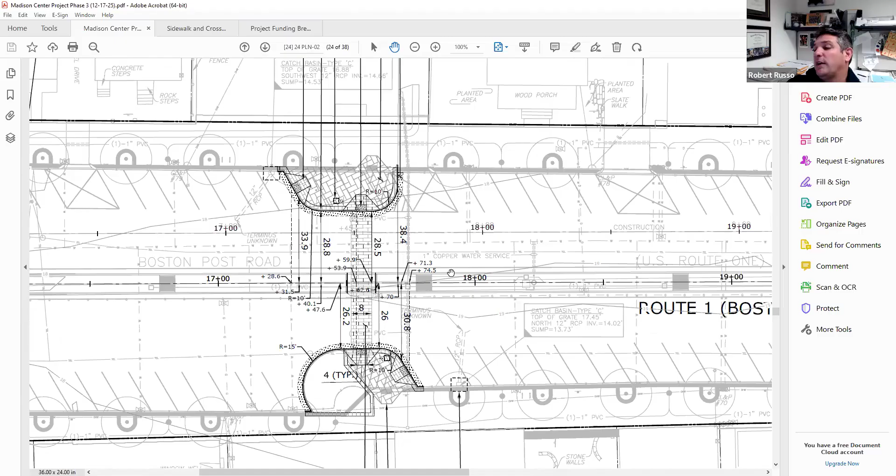I think that was certainly something very desirable. Historically the state was always resistant to mid-block crossings, not at a stoplight or anything, but they've really changed their whole view of these things in terms of trying to make things more pedestrian friendly.

We really wanted this as part of the project because everyone agrees it's a little chaotic with people crossing wherever. So we're going to try to get rid of those little tiny sections of the median that people try to walk on, and get them to use the crosswalk instead, which will be safer.

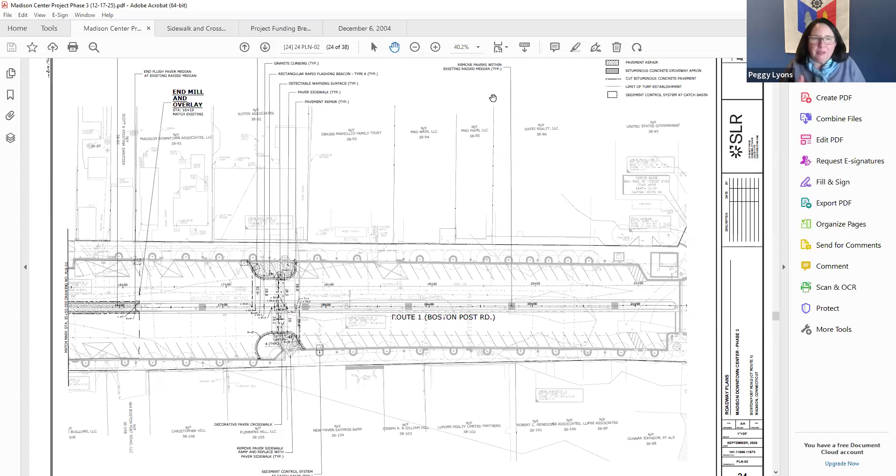It'll be ADA accessible with ramps and things like that. We have a note here to remove pavers within the existing median. You can see here, 1, 2, 3, 4, 5 - there are 5 of these brick paver areas.

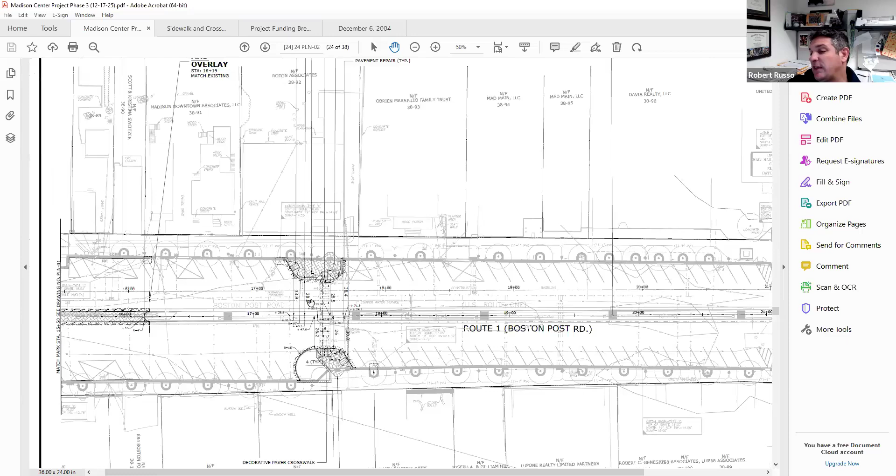We'll be removing those and adding landscaping, so you'll have a safe means to cross the street with this mid-block crossing. Outside of that, we'll extend a flush median here in front of the firehouse, since for safety reasons they need to access both westbound and eastbound.

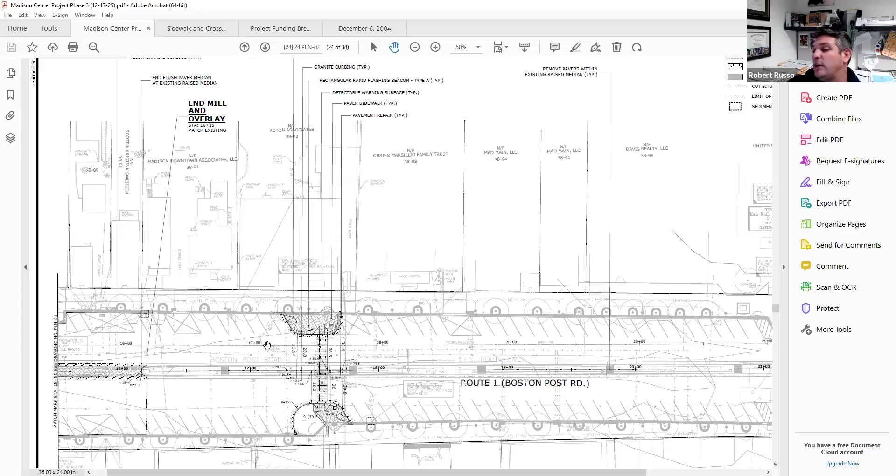Going back to that prior sheet - from where our existing island ends now, there'll be a flush paver median to about where it lines up past the firehouse, past their driveway. We'll start the other median lined up with the Tuxis Pond walkway, so fire apparatus and trucks can come out and go westbound or eastbound.

There were a number of DOT comments, and we also provided some input. If you're available January 12th, feel free to chime in and take a listen. If not, I could send you our latest and greatest plans in early January.

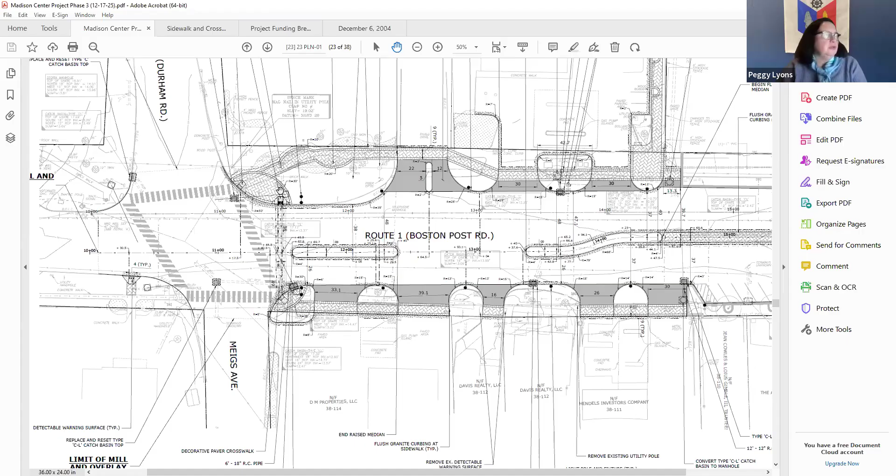I also want to mention that the state is redoing the crosswalks and the lights at that intersection, and that impacted the design a bit.

We've asked about returning that secondary back exit onto Route 79 that they did temporarily. They're pretty much a brick wall on that - that area is designated as their right of way line, and it's considered a non-access line.

You can't necessarily break it - they heavily advise against it and generally don't break these non-access lines. Not that you couldn't, but from my understanding speaking with the state, it's a significant process, and they're not particularly keen on breaking this line.

For the improvements done here to this property recently, that was permitted only as temporary - it was more of a hardship suggestion due to closing down these businesses here. So they allowed this temporary break, but from my understanding, they're not open to breaking this for permanent access on Durham Road.

The feedback was unbelievably positive when it was open. Unbelievably positive, I know. I intend to keep pushing this a little bit with them.

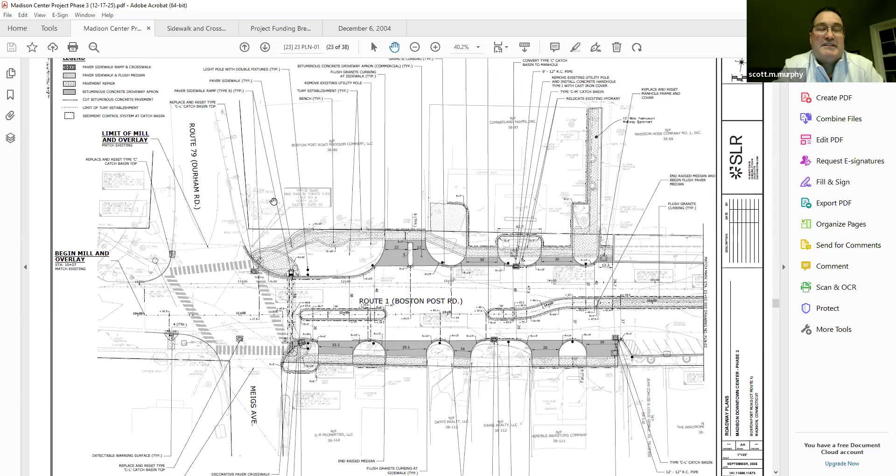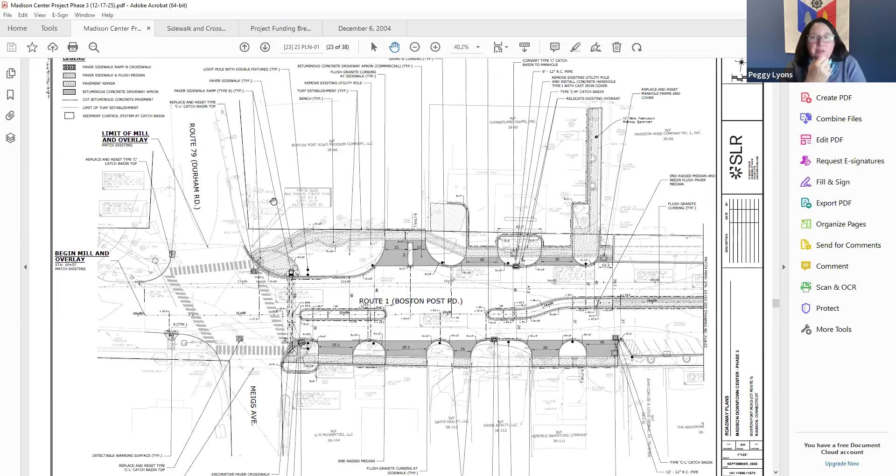One thing I'd like to note is that the town pursuing that alternative is not part of the downtown center project. We're currently on a ticking clock and we don't want to blur the lines or upset the state. I get it. So that's going to be a separate conversation once we get our plan approved for this, because it's not really related, it's private property. But it is something we all recognize could be a big benefit to the traffic down there.

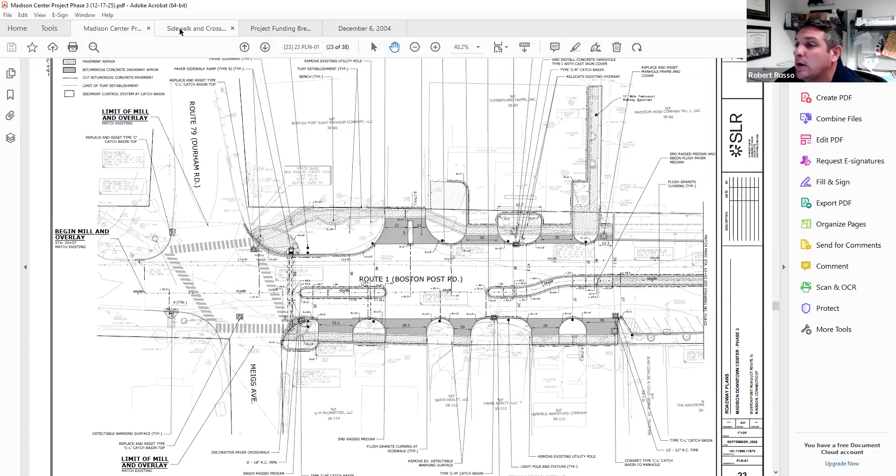So that's basically it, we'll have clearer plans again. These are probably around 50% now, we'll have like 75% with DOT incorporated comments come January 12th. And with that, I'll segue over to the sidewalk crosswalk project.

Again, this is multiple sheets, so I'll resend the link that I sent with West. Essentially this is Surf Club Road and West Wharf, so we're proposing the sidewalk along West Wharf here.

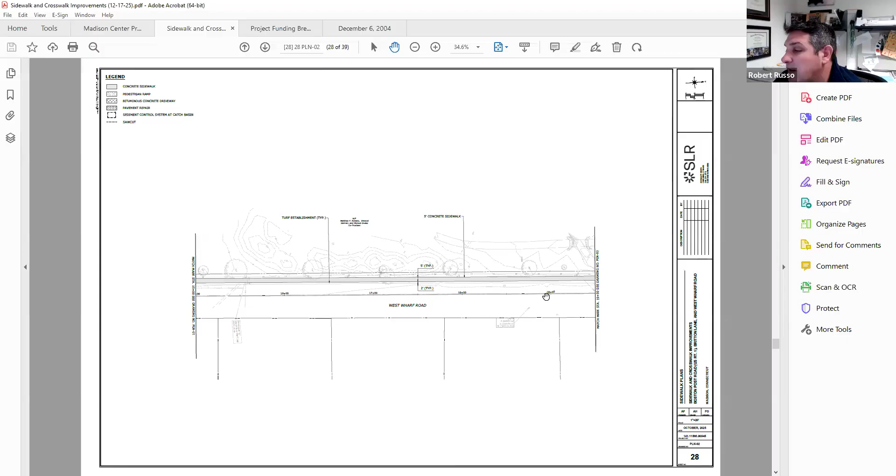This is the golf course on this side here, the westerly side of the sheet. We continue going along up West Wharf, accessing the club parking lot here, and then ultimately we get to the intersection of West Wharf and Boston Post Road.

As the DOT had recommended as part of our LOTCIP application, we have the crosswalks here and the rapid rectangular flashing beacons, but we also have a bus stop location right here, and on this side, another bus stop location as well. Again, that came at the suggestion of the DOT.

So that stop location is right by that house on the corner, Rob? Well, on the north side or the south side? Where you were just pointing. Right here. There's actually a bus stop over here, the westbound bus stop. Is there one on the north, up top of the road too? Yeah, it's over here. Isn't that right by the house? Isn't there a house right there on the corner? No, this is the parking lot for the country club. Okay, I'm not oriented right. Okay, yeah, the clubhouse for the country club is right here, with all their parking.

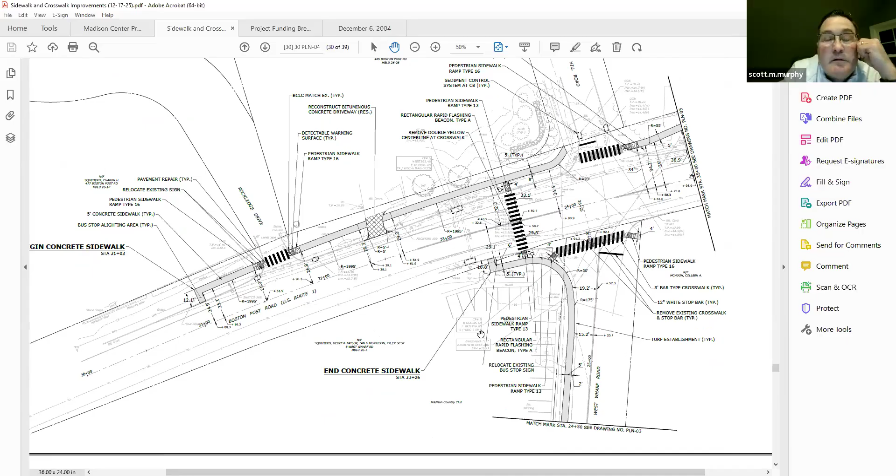So that's this sheet, and then just moving along here we'll continue. Basically you have the ability to cross over Lantern Hill, and then going eastbound on the north side of Boston Post Road, you'll be able to follow the sidewalk along here. We tried to keep it away from the road for a portion of it, but because of some rock outcroppings, we had to keep it abutting the roadway. The good thing is there's an 8-foot roadway shoulder there, so it's not exactly right next to the vehicular travel, there's still an 8-foot zone.

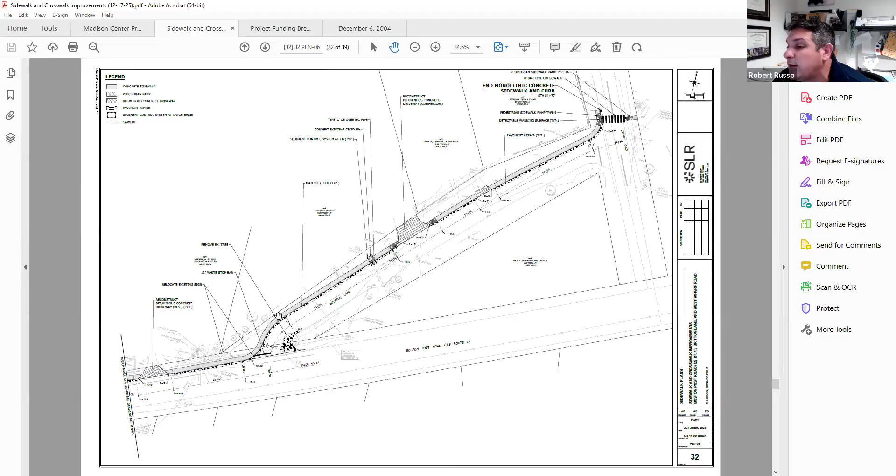So we'll follow along the north side here until we get to Britton Lane. Again, pardon me, this is a preliminary design, this curve in Britton Lane is going to be altered a bit, it's not going to be as sharp, we're going to tweak this. But essentially the sidewalk will follow along the north side of Boston Post Road and then enter Britton Lane on the north side, ultimately making its way up to Copse Road, where we'll have a crosswalk to access.

This right here is the town green. So you'll be able to go from downtown center to the town green, or if you're at the farmers market, you want to walk down to the beach. This is a highly frequently pedestrian traveled corridor, especially in the summertime. So if you're at the concert and want to go to the beach, or vice versa, you have the ability to walk in between the town green, ultimately connecting to the downtown center as well, to the Madison, to the surf club.

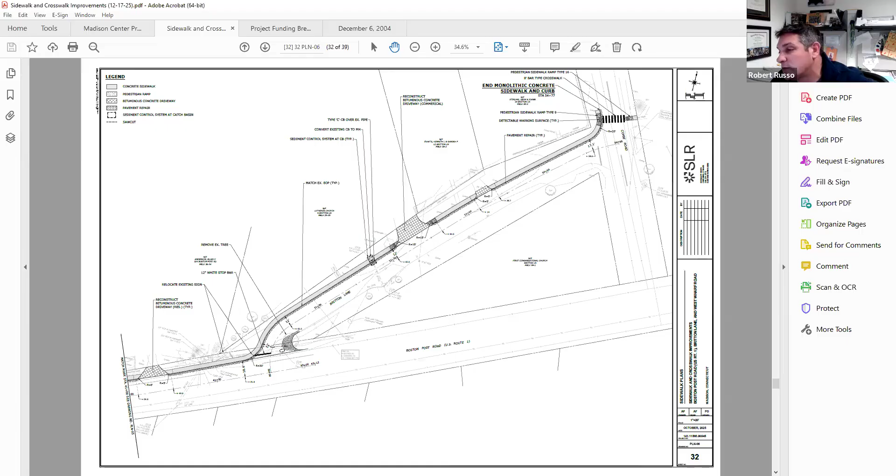Rob, why not put the sidewalk on the triangle portion there, which is all undeveloped? This is grass, over here. Yeah.

Yeah, I guess that's an option as well. I mean, there's really no...

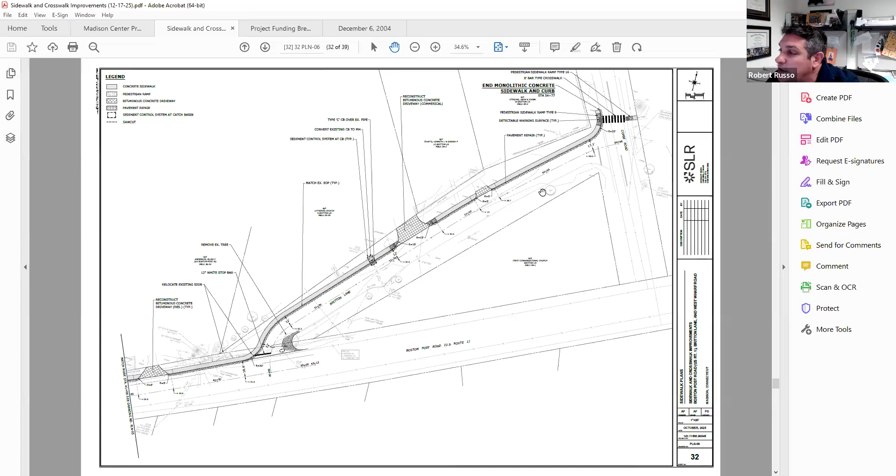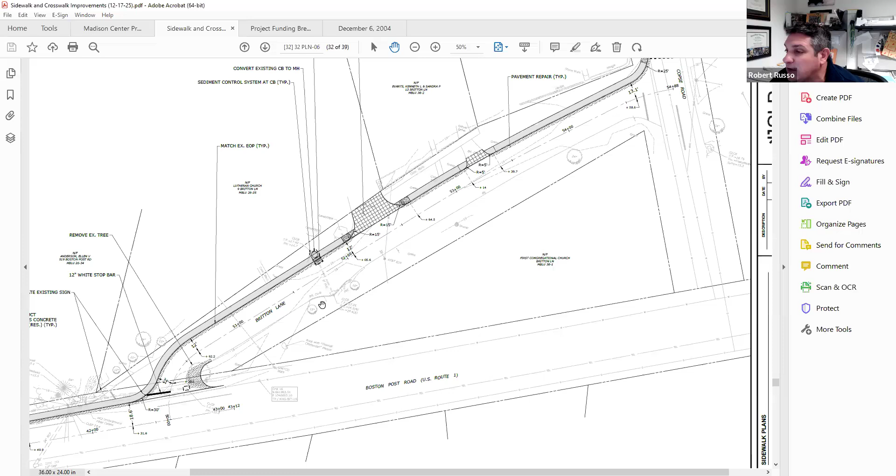The reason why is there's a utility pole and a number of trees on the south side here. There's a pole in here somewhere, and here's a pole. On the north side, once you get around this curve, it's a straight run. Outside of just relocating this drainage structure, there's really not much impact on the north side. But on the south side, that was one of the reasons why when we looked at this side, there's a number of trees, and also a drainage structure as well as a utility pole.

Well, it looks like it would require more crosswalks too, right? Because you'd then have to have another crosswalk over at this corner, and then cross again, and then over on that cross end too. So here you'd have to have two crosswalks.

So they try to find the path of least resistance, so to speak, in terms of obstructions and the least amount of crossing. This was also the DOT's recommended alternative. So when we had our engineers look at this, they agreed with the DOT when we got those LOTCIP project comments. So we ultimately vetted this and thought this was a good alignment, being able to stay on the north side and not having to cross, given these obstructions here.

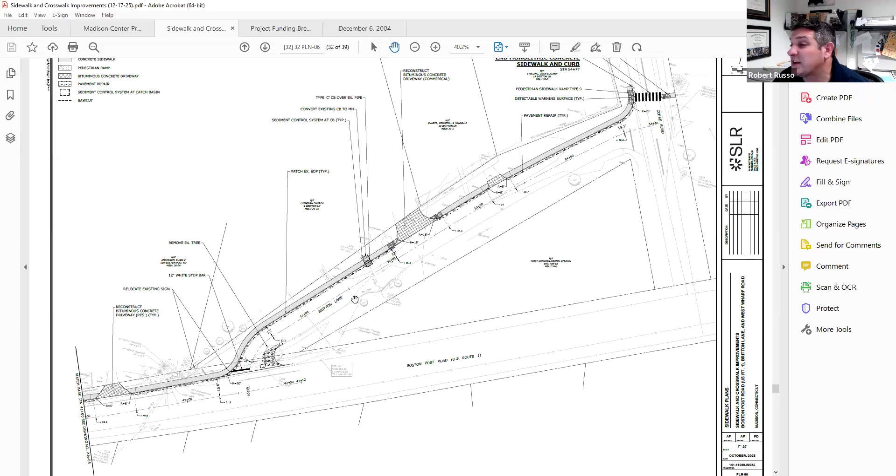So that's pretty much this section. But then there's also another section of town I'm equally excited about, because I think this links together all sorts of residents, park users, and commercial businesses.

So basically, now we went from the west end to kind of the east end of town here. This is all packaged as one LOTCIP application now, just as they had recommended doing. So right here, basically...

This is that auxiliary lot for Hammonasset that fronts Boston Post Road. The entrance to the park is kind of off the sheet, out over here, but here's that auxiliary lot that a lot of people use, the Shoreline Greenway Trail lot. A lot of times that's used as overflow parking in the summertime.

There's also a pedestrian footpath, not shown on the plans here, that kind of goes through here, and you can see a piece of it. But it was important for us to provide ADA accessibility, so it's not just this footpath. Now we're going to provide a sidewalk, basically from the mouth of the driveway apron, where now you could go east.

This is the Middlesex facility over here, and I think there's other businesses in there as well. But then you get to the intersection here at Dudley Lane, where you're at Boston Post Road and Dudley Lane.

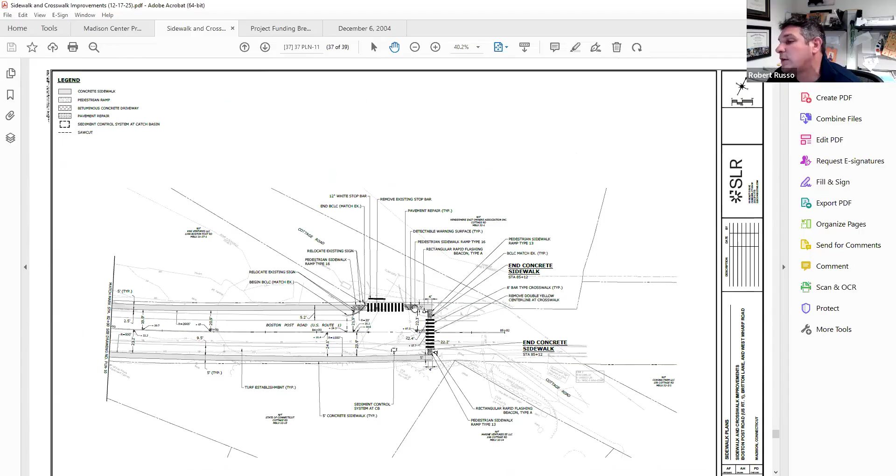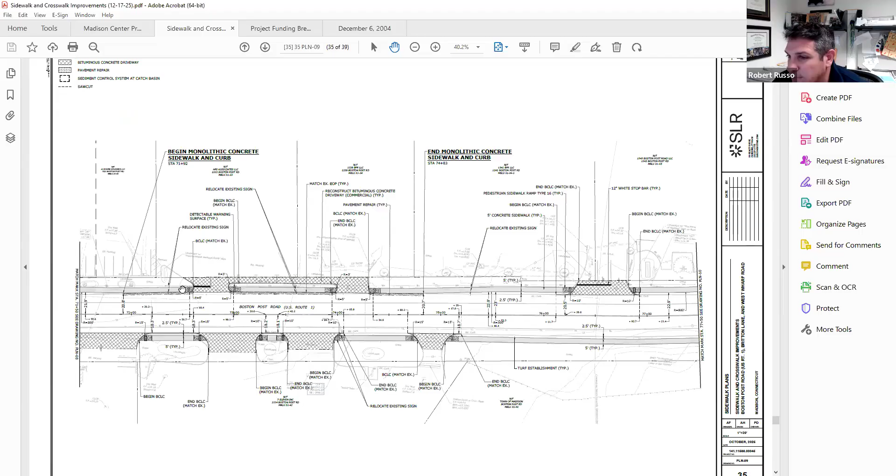You can go to the dog park, or continue walking, and then there's another crosswalk down by Cottage Road. You'll be able to come around, cross here as well as across Cottage, and it brings you back the other way past all these businesses - Lacrosse Unlimited, Cohen's Bagels, Hammond's package store, and others - circling you back to Dunkin' Donuts.

So this is a huge sidewalk loop in a very heavily commercialized area, including two major parks, one state and one town. You have multiple residents in this area as well as people out of town who utilize it. I'm very excited to get this section of sidewalk installed as well.

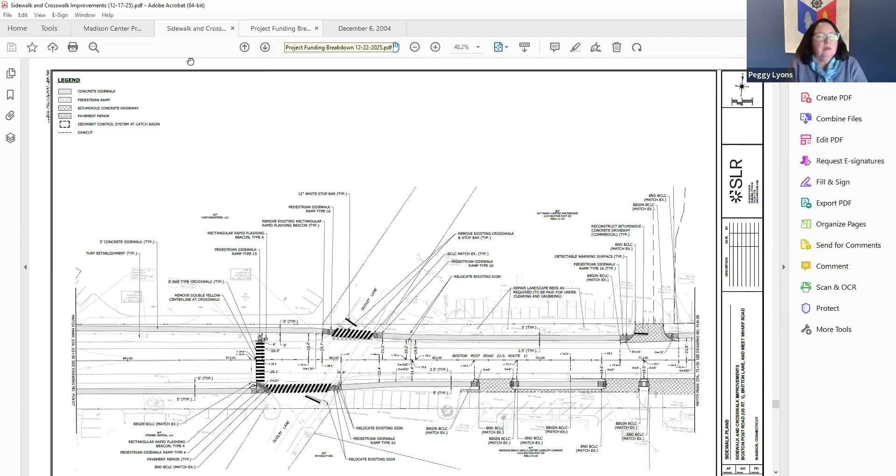So, this project didn't include Scotland though, right? No. That's a whole other project, completely different.

Also included on my Google Drive link is a project breakdown with the anticipated construction timeline. Both of these will most likely be 2-season projects. Downtown Center is certainly going to be 2 seasons because we're definitely not going to construct it in the summertime. A lot depends on when our permits come back.

But right now, assuming everything goes smoothly with the state permitting, most likely a fall construction timeline. We'll partially get some done in the fall and find a break line to continue in the spring - maybe not so much for the Boston Post Road sidewalk and crosswalk.

If we get a good contractor, like we did with the Woodland Road, Durham Road, and Bradley Road project, we may be able to get this done in one season. Especially because this project is LOTCIP-funded, I'd love to see it sped through in the next month or two with limited permitting hiccups, so we could start in the spring and have those sidewalks usable by this upcoming summer.

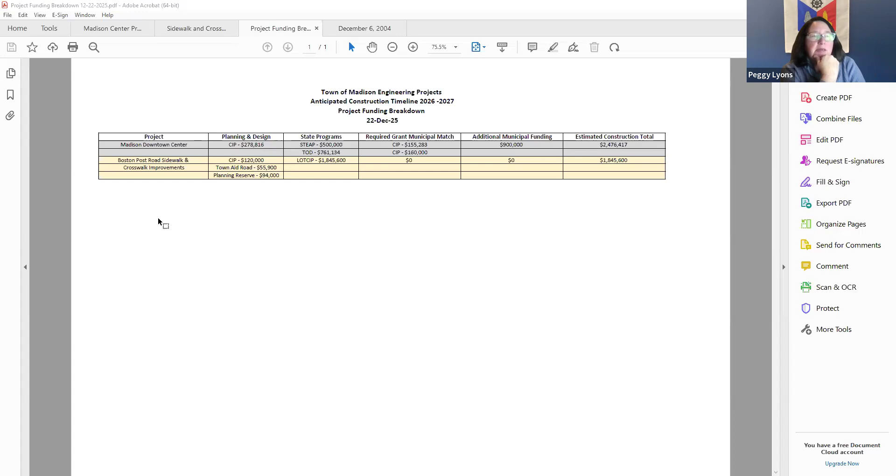So we'll talk more about that, I think, probably like the end of January, early February, going through some of that. Because what's great about LOTCIP is it picks up a lot, so that's great on the sidewalk projects. But that's kind of where we are, which I think is really exciting, to see these things happen, get close to starting at least, but we got to figure out the funding piece.

Obviously on the Madison Center project, I would definitely suggest for the public information meetings on January 12th - I think that would be good because the plans will be, it'll be interesting to see myself come early January prior to the meeting, which will show the incorporated DOT comments. And I can certainly send you, the board, a copy of those plans as well prior to that meeting.

But again, the BPAC's doing a great job. So just so everyone here knows, we started this with Scotland Avenue. We wanted to provide - we ran into a situation when we did the Woodland Road, Durham Road, and Bradley Road sidewalk project. Even though the town did all its due diligence in notifying people of the project and advertising it, put it on social media, there were still people who said they were unaware about the sidewalk project.

To add another layer of transparency with these projects, the BPAC and I have worked together. Not only do we send abutters letters and advertise the public information meeting, put it in the source, put it on our website, but the BPAC's been doing a great job as the weeks get closer to these public information meetings - it's still evolving - but they've put forth this boots on the ground approach where they go out and walk door to door or to each business letting them know of the potential project and the public information meeting, like the Scotland Avenue public information meeting we had back in September. Since I've been here, approaching 15 years now, I can't recall a public information meeting with that type of attendance.